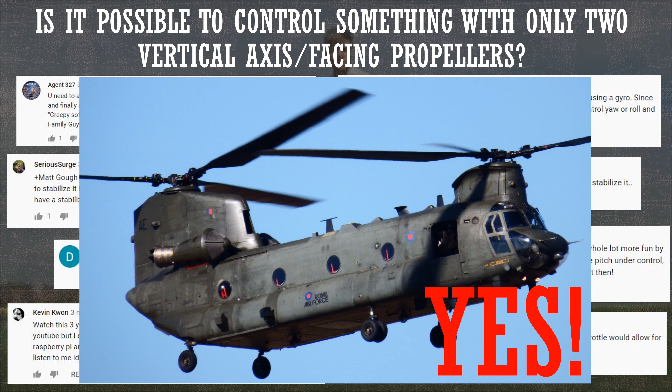So the question is: is it possible to control something with only 2 vertical-facing propellers? And the answer is yes. A resounding yes. In fact, it's already been done before. So let's talk about some of the helicopter tech you would need, some of the propeller effects, and then go into how we would control movement in the different directions.

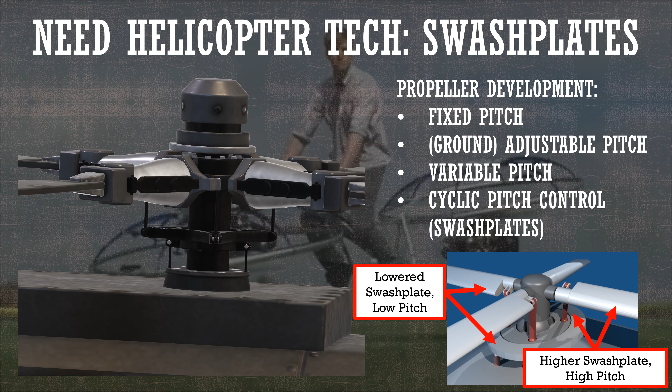Over the years, we've seen developments in propellers. Way back in the day, they used to be fixed pitch, meaning the pitch never changes. Then came adjustable pitch propellers, or ground adjustable pitch, which could only be changed while the airplane was on the ground, where a mechanic would unbolt the propeller, adjust the pitch, and retighten it. After that came variable pitch, a propeller you could change the pitch of while flying. This also gave way to constant speed propellers, where you could run the propeller at the speed most efficient for your engine, then change the pitch to get more or less thrust.

However, helicopters took it one step further with swash plates. The idea behind a swash plate is it gives you what's called cyclic pitch control. The swash plate is essentially a bearing. On one side you have the fixed linkages that go into the helicopter, and on the other side, which rotates with the blades, you have another set of linkages. This allows you to pull down on one of the non-rotating linkages to move the orientation of the swash plate, lowering one side and raising the other. By tilting the swash plate, the linkages that rotate with the propellers change the pitch of each blade depending on where it is in the rotation. If a blade is near the high side of the swash plate, that link pushes on the blade and creates a higher pitch. If it's on the lower side, it creates a lower pitch.

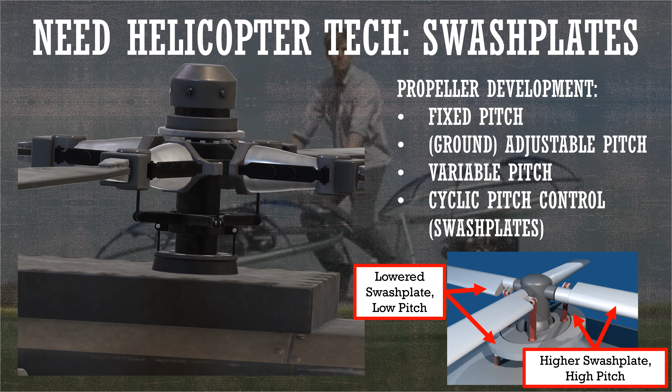To understand control of the craft, we need to understand the effect these propellers have. The first effect is reaction torque from the motor. We know from Newton's third law that if you push on something, it pushes back. The motor is pushing on the propeller to turn it, and therefore the propeller is pushing on the motor in the opposite direction. This is why traditional helicopters have a tail rotor, to provide a counter torque to this reactionary torque. Now with the hover bike, if we made one of the propellers spin in the opposite direction as the other, called counter-rotating propellers, the reaction torque developed when the motor pushes on the propeller is canceled out by the other propeller's reactionary torque.

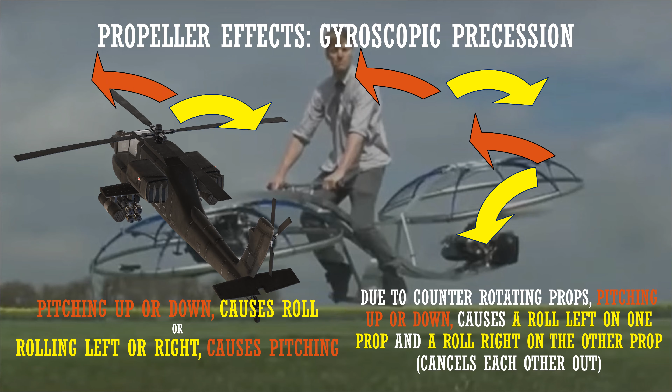And so with this two propeller system, we don't have to worry about the reaction torque from a motor causing a yaw. Another propeller effect is gyroscopic precession.

There's actually some pretty cool physics going on behind this phenomenon, but I'm going to simplify it and say that if you rotate about two axes, you have a third rotation on a third axis. For a traditional helicopter, the spinning propeller is rotation about the first axis. When you pitch up or pitch down, that's rotation about the second axis. And it's going to cause the helicopter to want to rotate about the third axis, which in this case would be rolling left or right.

The same thing happens if you try and roll left or right. The propeller spinning would be rotation about the first axis. Rolling left or right would be rotation about the second axis. And so it wants to induce a rotation about the third axis, which would be pitching up or down.

Now here on the right, for a two propeller system, you don't have to worry about gyroscopic precession. That is because due to the counter-rotating propellers, if you pitch up or pitch down, one propeller is going to want to roll left and the other one is going to want to roll right, and they cancel each other out. Likewise, if you roll left or roll right, one of the propellers is going to want to pitch up and the other one's going to want to pitch down, and they cancel each other out.

Another propeller effect is P-factor, or propeller factor. This comes about when the rotation or thrust axis of the propeller is not aligned with the flight direction. Long story short, as the propeller rotates, there's going to be a difference in blade velocity, and the angle of attack that the blade sees is different whether it is ascending or descending. Essentially this causes the propeller to produce more lift on one side than the other.

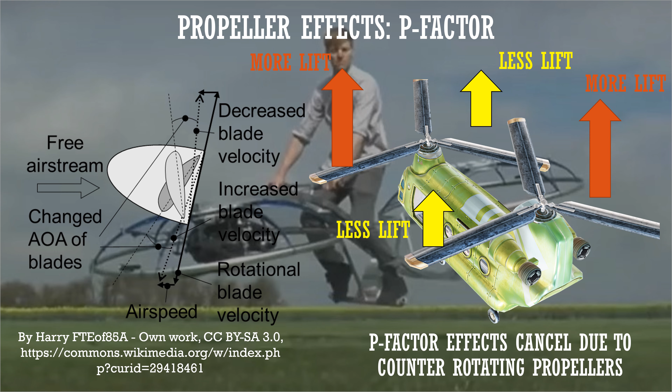Now on our two propeller aircraft, we actually don't have to worry about this, because with counter-rotating propellers, one of the propellers is going to see more lift on one side and the other propeller is going to see more lift on the other side. So this propeller factor cancels out when you use counter-rotating propellers, thereby simplifying the controls that we will need for our two propeller aircraft.

It gets pretty complicated when you're looking at an aircraft, because depending on which way the propeller is spinning, the slipstream can either want the left wing to go up and the right wing to go down, or the right wing to go up and the left wing to go down. And it also can affect your elevator and rudder.

Now for our two propeller aircraft, and for instance the Chinook helicopter, it's a little bit simpler than that. What happens is that with these counter-rotating propellers, the side of the helicopter that the propellers sweep towards is going to have the slipstreams kind of hitting the side of that aircraft, and it's going to want to drift towards the other side. Now we will have to take this effect into account, but it's easy to manage.

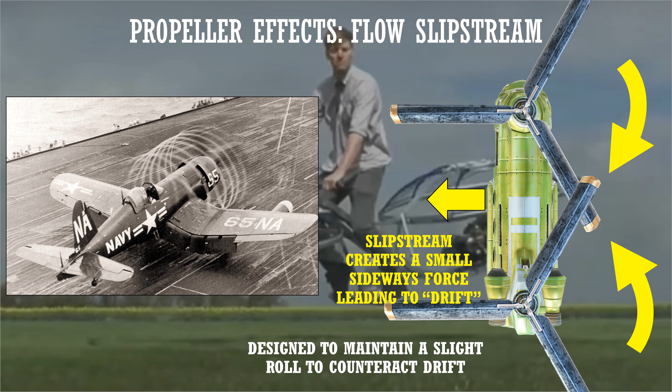Usually we just design the craft to have a slight roll towards the side that the propellers are sweeping towards the body. That way that very tiny amount of roll is actually canceling the drift developed by the slipstream.

Let's go ahead and talk about how movement can be controlled in the six degrees of freedom. Let's start first with moving up and down.

If you want to move up, you need to increase the lift of both propellers equally above the gravitational force on your aircraft. And if you want to go down, likewise, you would decrease the lift on your aircraft below gravitational force. You're going to do this equally on both blades, by either increasing or decreasing their speed and/or their pitch.

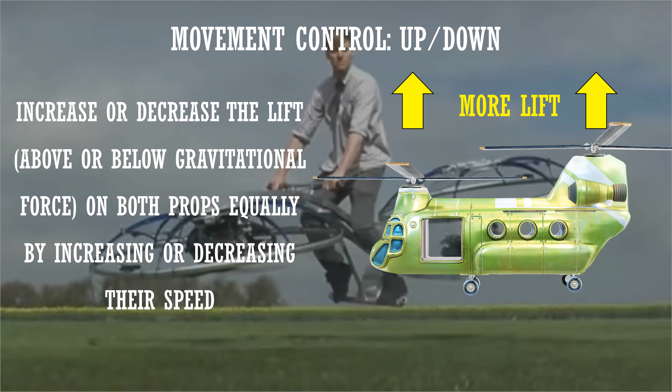Now let's talk about moving forwards and backwards, or rotating the aircraft's nose up or down. On a two propeller aircraft with the propellers arranged so that one is towards the nose and one is aft, this would be accomplished by increasing the lift on one propeller and decreasing the lift on the other. This is going to cause the aircraft to pitch either up or down depending on which one you chose to increase or decrease.

This can be accomplished by adjusting their speeds or the collective pitch on the propellers. What happens when you rotate about this axis is that the direction of the total lift goes from vertical to angled slightly forwards or backwards. Using vector calculus, we can split that total lift vector into a vertical component counteracting gravity, and a horizontal component that moves the aircraft forwards or backwards.

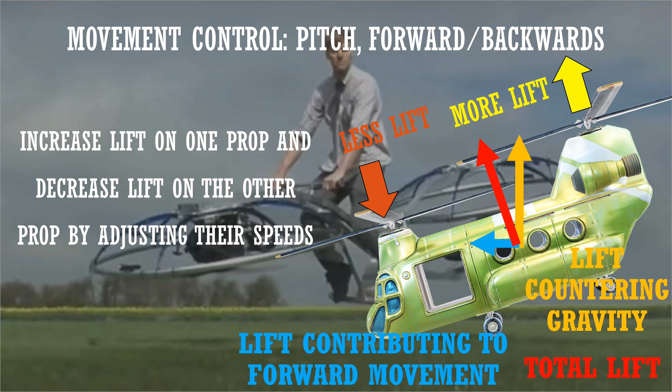Let's talk about the last degree of freedom, rotation about the vertical axis, also known as yaw. This is the other reason we need a swash plate for our two propeller aircraft. To induce a yaw, we use the swash plate so it's opposite on the propellers. This means that on one propeller there's more lift on one side of the aircraft, and on the other propeller, more lift on the opposite side.

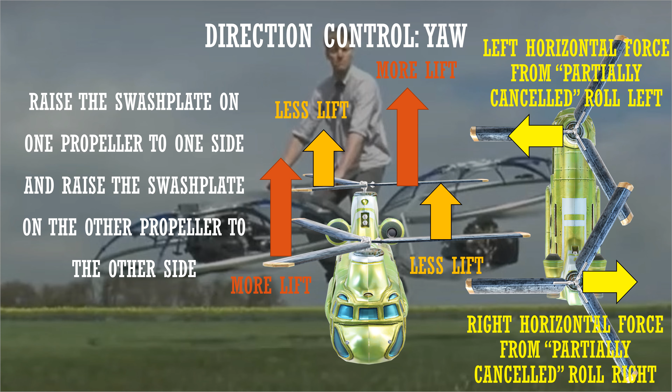For the front propeller, the more lift is on the right side, which wants to cause it to roll to the left. However, the back propeller has more lift on the left side, causing it to want to roll to the right. So one propeller wants to roll one way, the other wants to roll the other way, and this rolling cancels out. However, this difference in lift leaves a horizontal component with a moment arm about the center of gravity that wants to yaw the aircraft.

Another part of a flight control system we need to take into account is the human control inputs to the system, whether that comes from a pilot actually riding on or in the aircraft, or from a remote pilot controlling it with a wireless transceiver.

For a helicopter, you see they have pedals, a cyclic control or stick, and the collective. There are several different ways to incorporate this. Obviously, if your aircraft was a UAV, you could have different joysticks doing different things.

If you're riding it like Colin is in this video, it wouldn't be too hard to come up with your own inputs to the system. He could still use pedals in his current configuration. He has a bar that he holds onto that could easily be allowed to move to control the cyclic control. You could easily have a thumb throttle, or more like a motorcycle, where you twist your wrist as a throttle control, or perhaps as a collective control.

You could also simplify it a little bit, and since this is supposed to be a quote-unquote hover bike, maybe you simplify it so the control system worries about the collective or throttle, and just tries to maintain a certain height above the ground. You'd obviously have to worry about some sort of cliff detection safety.

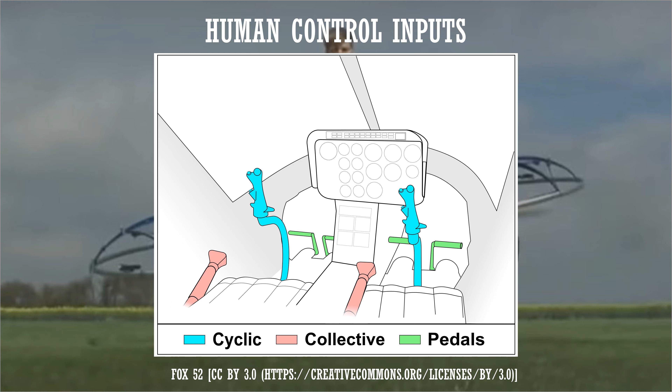You could even lose the pedals and incorporate it into the bar that he holds onto, where you can either push it forwards and backwards, left or right, or spin it. So there are several different ways to do the human inputs into this hover bike. And then of course you get all the fun of worrying about command shaping and feel of the joystick and handling and flying qualities that come along with it.